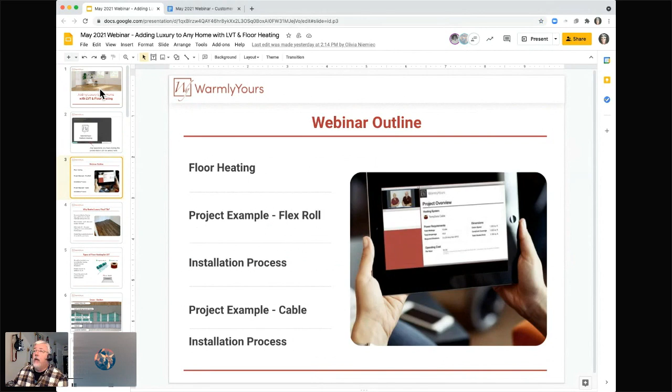So we get the question, why LVT? Well, the reason why LVT is such a popular choice right now is that it's very cost effective. It allows you to get the look of other materials out there in the marketplace without the cost that those other products can lead to. It's very, very durable. It's scuff, stain, and scratch resistant, and it lasts for a long time.

Often it can last 20 to 25 years, making it a more sustainable flooring type. And the thing is that you'll probably tire of the look before it fails or before it gets unusable. So it really has a very good lifespan. And with floor heating, it can add a little bit of extra comfort to your home. So those are a lot of the good things about LVT. It's a very, very popular choice right now simply because of those reasons as we stated above.

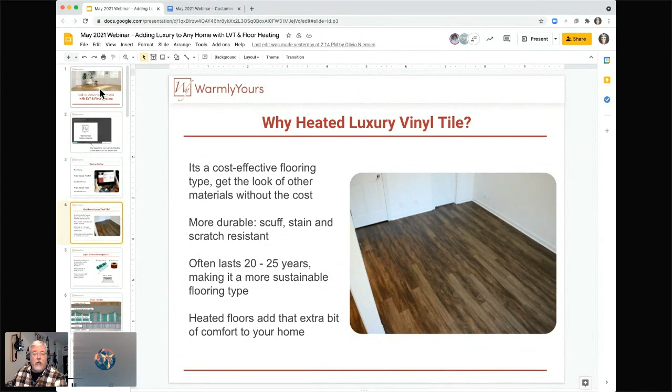And what kind of heat should be used with LVT? We have two specific types of products to heat floors. The thing about LVT is it should be installed over an embedded heating system, such as TempZone. And you'll probably see that in the installation manual, where it will ask you to use the product with embedded heat. As soon as you see the word embedded, it seems a bit counterintuitive, but you'll be discussing our product that is to be used with tile.

So this tile type installation with the cable and with the flex roll allows you to be very, very flexible with the amount of watts per square foot that you're using to heat the product. If you're on a third floor directly over another heated room, your floor is going to start at 68 or 70 degrees anyway, maybe a little bit warmer. So you don't need a whole bunch of watts per square foot, as opposed to if it's on the ground floor over an unheated crawl space. You're going to want more watts per square foot over an unheated space than you are going over a heated space, like a second or third floor room.

The LVT cannot be paired with our Environ floor heating system, the stuff that's silver. So if you see the silver product, it's made for floating applications. You first of all think, oh, my LVT is floating, so I need to use the Environ. Well, you don't want to do that. The Environ is designed for a more resilient product like laminate or engineered wood, and LVT isn't as resilient as that.

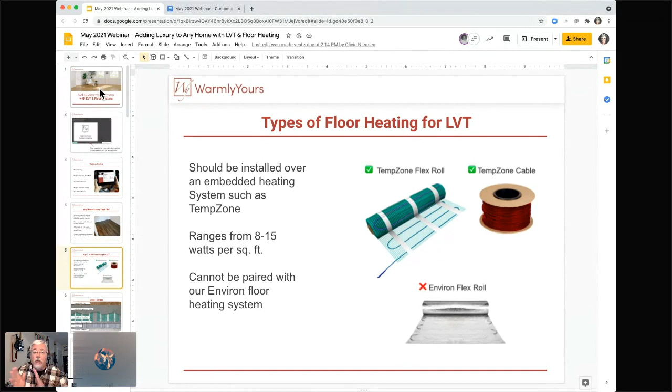So let's go ahead and take a look at the cross sections, and we're starting to put the pieces together why you need to disconnect floating from non-floating when it comes to this particular application. Floating with laminate and with engineered wood, and embedded with LVT. Even though they're both floating products, you're going to be learning the reasons why. So let's take a look at the cross section here. As we talked about, different situations require different modes of protection to provide heat.

So if you're on the third floor over a wooden subfloor, you don't really have to worry about heat loss below the heating system. But when you're going over concrete, you do have to worry about that. So if you look here at the bottom of the picture, you can see the concrete subfloor. The concrete subfloor is going to try to pull any heat down that it can. And that's what happens when you put electric heating wire directly on a concrete slab. It's going to pull the heat down before it ever lets the heat go upwards to where you really want it to go.

Now, in the old days, 30, 40, 50 years ago, the only way you'd heat a floor is with hot water. When you're heating a floor with hot water, you're actually heating a gigantic thermal mass, which is a big, thick concrete slab, 3 to 5 to 6 inches thick.

Well, we found in the electric business that you can regulate the temperature more accurately. You can make it heat up a little quicker, and you can use less electricity, actually, if you just heat the thin layer above the concrete slab. So we're one of the first companies out there to discover that you're going to get better results by putting the electric heating wire on an insulator.

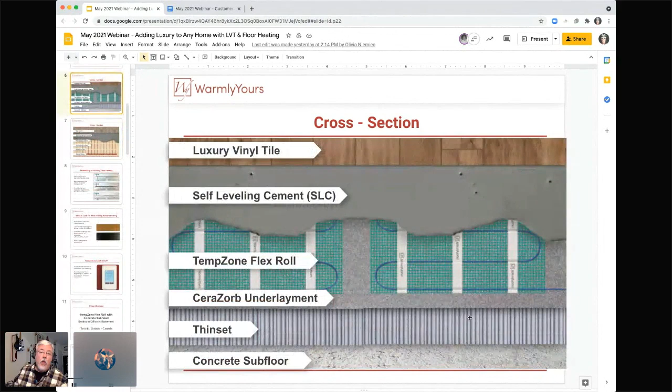So here, we're going to make sure that our mats are attached very, very well to the CeraZorb with hot glue. And here, we're going to make sure that our cables are attached to the subfloor very, very well with masking tape. So that's going to keep the cables from floating. Then you can put the self-leveling over the top of that. That will give you a flat surface. And then you can lay LVT over the top of it. You can even tile over the top of it.

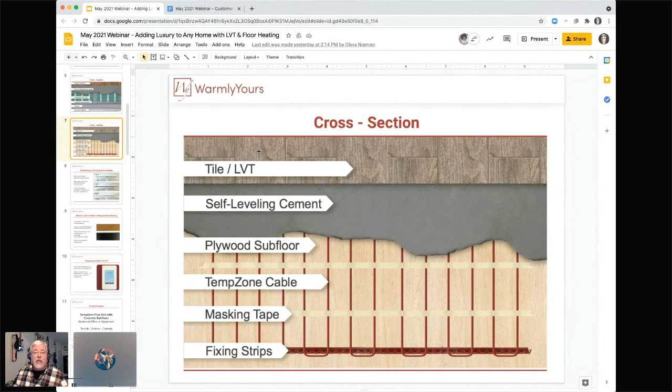This is what a lot of people do when they're installing tile. They'll just put the cable down, then cover it with self-leveling. That gives them a heated subfloor that they can attach tile to. The good thing is, if you get tired of your tile, you can probably remove it and put a new type of tile on there without ever getting down into the heating cable. So what we're showing you here is a way to make a heated subfloor to lay your product on top of.

This gets down to the nitty-gritty on why we strongly suggest that you use self-leveling, because we know it's more expensive. We know people like to mix thin set up very, very thin. But you should never mix thin set up that thin, because it doesn't comply with the instructions. How about that? We'll keep it in layman's terms here.

If we take a look at this embedding versus a floating floor for heating, LVT is much more flexible than other flooring types. It may mold itself to the surface beneath it over the years, so you may not notice a bump in your floor right away. This bump is just a piece we've used as a box, and we let time lapse here so you can see what happens to LVT over time. It's called drape, or sometimes droop, but a lot of times it's called drape. The drape of the LVT causes it to conform to the surfaces below it, so you may see a little spot in the middle of your floor sticking up two or three years later. That's simply the LVT bending around it.

You don't want to be using a product like our Environ product, because with it you can actually feel the ridges of the cable. That's why laminate is used over that, because laminate won't droop over the wire. But theoretically, over the years, if you used our Environ product, you could eventually see the wires going back and across your LVT tiles or planks, because it conforms to what's below it. That's why LVT installation guides usually have a much stricter flatness requirement than laminate, because laminate can bridge little gaps where it's not exactly flat. LVT will eventually droop or drape, and you'll see spots where it's uneven over time.

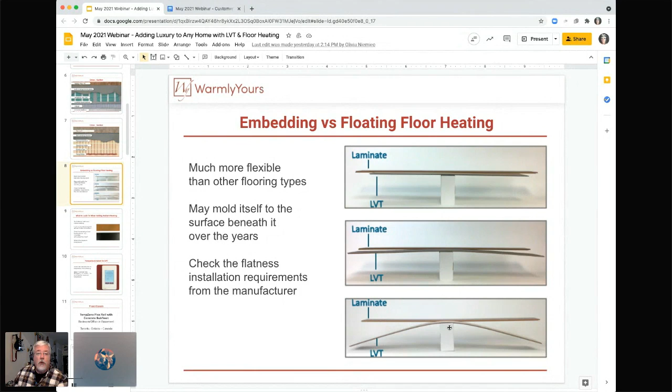Also, another reason why you would never want to use thin set with a trowel: no one can ever get thin set completely flat, no matter how many years they've been doing it. If you leave even a millimeter difference, and you step on a spot that's a little lower, then step on the LVT, it'll sound hollow. That's because even being a millimeter off with your thin set and trowel, any higher areas left by the trowel will create hollow areas on each side of it. That's another reason why you don't want to use thin set over the heating wire, and it's because of this picture here exactly.

What do you want to look for in LVT when you're adding radiant heating to your floor? Try to find an LVT with little or minimal backing. The more backing you have, if it is cork or foam, cork is a natural insulator and foam is an insulator. The last thing you want to do is create a nice flat heated subfloor, then put a layer of insulation over the top of it, and then your LVT. That's what happens if you put a really thick pad between the LVT and the self-leveling.

We want to minimize any R value between the heated subfloor and where your foot hits, so you're going to look for an assembled plank with an R value of less than 1.

Another very important thing is to check the warranty of your flooring choice. Is it compatible with radiant floor heat, yes or no? Because the last thing you want to do is install a product that isn't manufactured to comply with electric floor heat and put floor heat under it.

Also, ask what is the maximum temperature allowed by the manufacturer of the LVT. One thing not on the presentation: if they do allow a maximum temperature, ask them if there is a setback temperature maximum. This means, if you've used one of our products with a programmable thermostat with tile, you can make it 86 degrees when you're walking on it, then cool it down to 70 when no one's using it, which helps you save money.

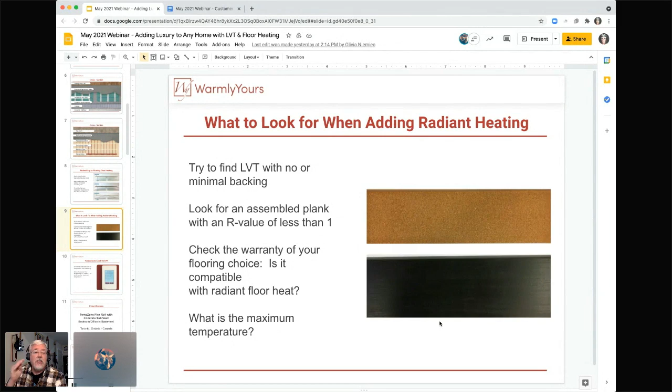So ask if it's allowed to be used with heat, and if it is okay to use with heat, are there any setback maximum temperature deviations that are allowed? LVT is going to have a temperature limit, and the manufacturers will tell you what that is. So check with them and find out what their requirement is.

If they say 82 degrees, well, that's fantastic, because we have an 82 default right here on the thermostat. If they say it's 81, you can go here to custom and choose that and set it to 81. And that's how you would set your maximum temperature limit for LVT.

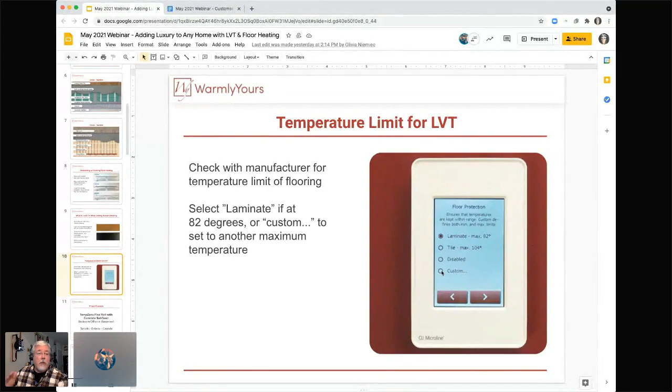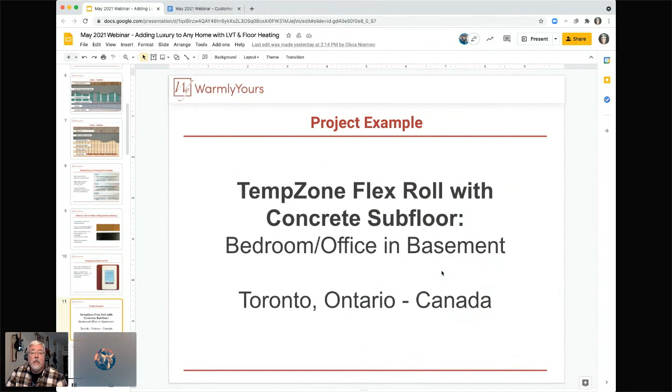So let's take a look at one of our projects that we've done here with a concrete subfloor in a basement in Toronto, Ontario, Canada.

So what you do is you start with a SmartPlan, which is a plan that shows how the product is laid out. And if you've never done one of these before, just get a hold of us and we will do this design for you for free with no obligation.

If you've never done one of these before, instead of trying to figure out how far do I roll this out, do I make any cuts and turns, what do I do? All you need to do is ask us, supply us with a drawing that shows the dimensions of each side, and we will do the installation drawing for you.

Just show us where you want the thermostat, because the thermostat location is very important, because that's where the mat is going to start. So if we take a look, you can see a triangle here, and a square over here. The triangle represents the start point, and the square represents the end point.

So you always want the start point to be within 10 feet of the thermostat, because you need to run the non-heating lead across the floor, up the wall to the thermostat. You also need to be able to get your thermostat sensor there, and you would run it in a different conduit up the wall to the thermostat.

It'll tell you what product fits in there, and also make sure that your dimensions are correct. So before you go cutting and turning your product, make sure that these dimensions shown on the plan actually match what is in the room.

We know in the construction business, room dimensions can change. If room dimensions get bigger, that's not the end of the world. But if they get smaller, it is, because you cannot cut the heating cable or the heating product. You can't buy an 800-foot cable and just string it across the room and then cut it when you're done. You cannot do that. You never, ever cut the heating wire.

The most important thing is to warm the area where your feet are. There's no way you're going to be able to heat every square inch of the room. So we try to find the unit that heats wherever you're going to walk, and not heat areas right up against the wall, because no one ever stands right up against the wall. And if we can eliminate heating those areas, we're going to save money on the heating product that you purchase. It's also going to save money on the operational cost.

So if we heat 129 square feet right here, we have a total wattage of 1900 watts, total amperage of 8.1 amps. So that is a 240 volt circuit. If this installation were under 120 square feet, we could use 120 volt. But because it's over 120, we're going to be using 240, because our thermostats can only switch 15 amps. 15 amps at 3-inch spacing, or 15 watts per square foot, equals a limit of about 120 square feet on one control. But if you use 240, you can go up to 240 square feet.

So that's the only benefit of 240 over 120 - it allows you to cover twice the space with the same number of amps, so half the amps in 240. If this were a 120 volt system, this would be way over - this would be 16 amps. You couldn't control it with one thermostat. So that's why this has been designed in 240. 240 is not more efficient than 120.

So down here at the bottom, we see operating costs, and here we can see per day to operate it.

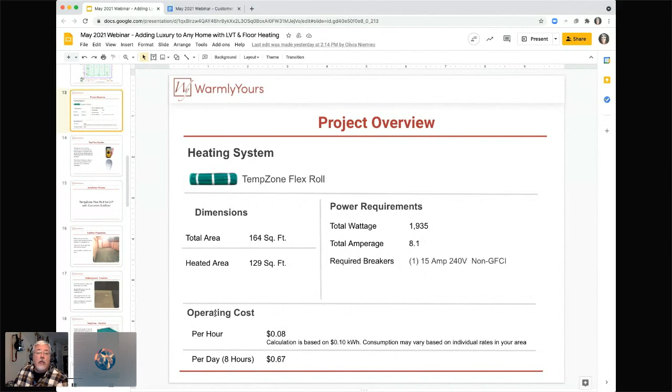When you get the product, test it. Make sure that it's good before you go to install it. If you get the product today and your installation is next week, test it today, because if something happened to your product from the warehouse to your doorstep, you want to find out now so you can get a replacement ordered and it's there in time. The last thing you want is a crew coming over, they've got the self-leveling mixed up, all mixed and ready to go, and you test it and it tests bad. Okay, bye everybody, come back later and we'll put it in when we can get a good product. You always test the product the day you get it to make sure that it is good.

You are going to need a digital ohm meter. There's no way to do this installation without one. The good thing is a digital ohm meter is usually $20 or less at any big box store. You want to use a meter that is not self-ranging - you want to be able to turn the knob right to the 200 range, not have it automatically trying to find the range. Get one that's inexpensive with a knob on the front that you can set to 200 and then 20K. The 200 is to test the floor heating, the 20K is to test the floor sensor.

So not only are you testing your product three times - before, during, and after your installation - you're also testing the thermostat sensor. And when you're actually working over the product, laying it out on the floor or covering it with self-leveling, you want to make sure that you have the circuit check on.

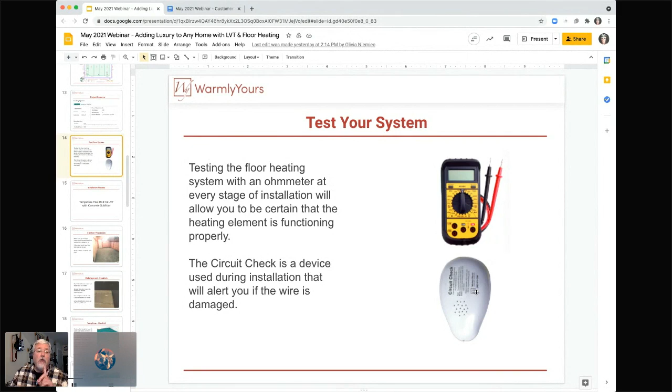So that's why it's so very important to test the system. You're going to need a circuit check, and you are going to need a digital ohm meter. So please keep that in mind.

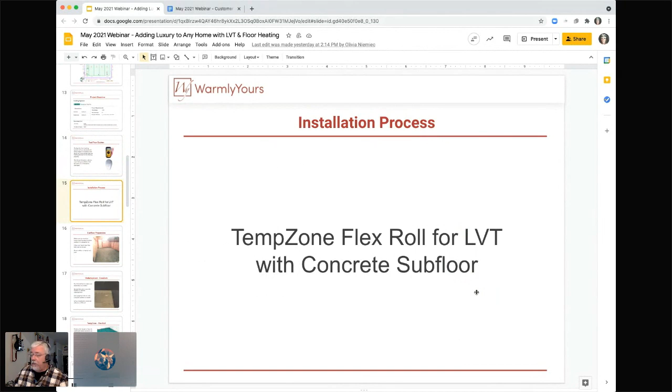So let's take a look with a TempZone Flex Roll with LVT on a concrete subfloor. We're building up to it - let's look at the real life installation. Here with our subfloor preparation, we're going to make sure that we check the LVT to make sure that it's good to be used with heat. If the floor isn't level at this point, we're going to put self-leveling on it first to get it completely flat. Then we're going to install the cable.

If this were a really old house and the slab was like this, if you put a cable here and a cable here and your floor is here, your edges are going to be warm, your center is going to be cold because they're too far away from the top of the floor surface. So that's why you need to level it first and then do all the buildup like we showed before. Make sure you clean the subfloor, get rid of the debris, and please make sure there's no grease or oil - those will need to be cleaned, because nothing will stick to it if you don't.

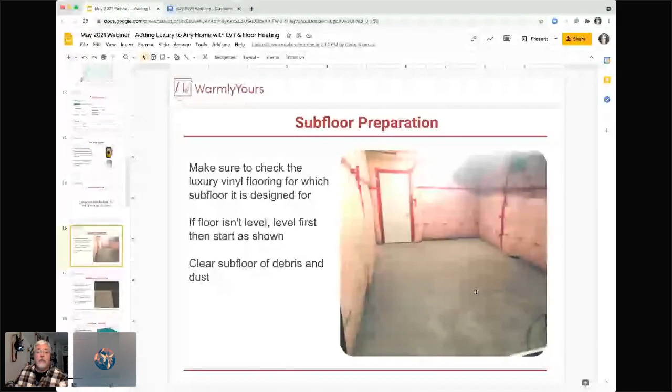So here we're going to be installing the Cerazorb. We dry fit the Cerazorb, and we do all of our cuts to make sure it fits. Then once everything fits, we start using the thin set, modified thin set, to attach it to the slab.

Use a weighted roller to get that Cerazorb adhered to the slab, and also lift up on the Cerazorb and look underneath to make sure you have good adhesion. If not, you need to make your thin set a little bit better. Sometimes the thin set has gotten too old, and when you push it down, it doesn't grab. So it's very important to make sure your thin set is in good condition and not timed out.

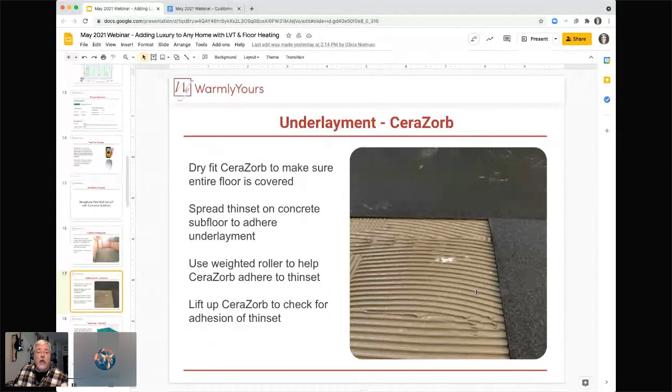So here we've laid the flex roll on the floor, and we followed the plan that we saw up here. Remember, here is our plan for this particular space, and here is us laying it out on the floor, just following the instructions.

So if you take note, we are going to be putting the cable side down. That's a question we get all the time. The roll is a piece of mesh that's fiberglass, and there's cable attached to one side of it. You can either install it cable side up or cable side down. We always recommend you install it cable side down as much as possible, because if you do it cable side up, the loops are not attached, so they're going to try to float to the top. You'll have the loop up here and the mat down here. That's why it's important to turn it mat side up, cable side down, because that keeps the loops from coming to the top of the pour.

So you're going to do your cuts and turns, lay it out on the plan, and then attach it to the subfloor using hot glue. Don't lay it out, glue it down, then do the next one and glue it. Do not do that, because you want to make sure everything fits first in the room, and then if everything fits with your cuts and turns, you go back and glue it down to make sure everything fits the way it should.

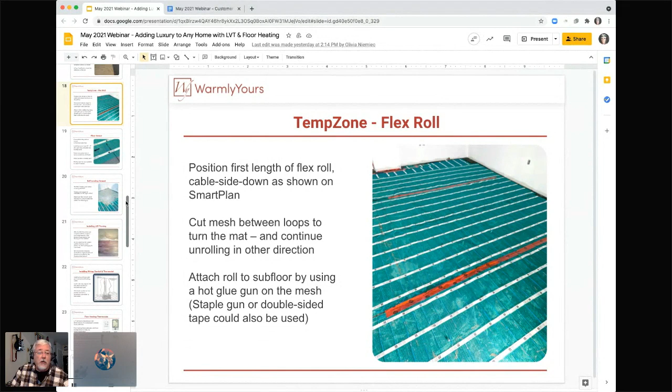Don't forget your floor sensor. The sensor is included in the thermostat box. So you may say, hey, I've got my thermostat, we'll worry about that later, I'll put it in after the system's installed. Don't do that. As soon as you get the product, open the thermostat box up, take the sensor out and give it to the installer, because they are going to need to have that. You would not believe the number of phone calls we get from people saying, I forgot to put the sensor in, we installed my entire floor and we didn't put the sensor in. That's because they forgot to open the thermostat box, take the sensor out and give it to the installer.

Here we can see with this drawing that the wires are facing downward, cable side down. Here we can see there's a loop right here, might be kind of hard to see with my cursor, and you can also see there's wire over here. We're running the sensor into the open loop, and we're only running it about 6 or 7 inches in.

You sometimes will see an installation where they run it all the way into the center of the room. You don't want to do that. The sensor only has to go in 7 or 8 inches into the side of the product, but put it somewhere where the sun is not going to hit it. Because if the sun hits the same spot every day, the sensor is going to think the whole floor is that warm, when really where the sun is hitting it's 85 degrees, and the rest of the floor is 65.

Keep in mind that the temperature from the sun is actually going to make your floor warmer than the floor heating elements below it ever will, because we're limiting our temperature to 82 or 83, whatever that requirement is, but there's no limit from sunshine. So sunshine hitting the floor can make it 120 degrees. That's something to keep in mind. The LVT, because you're using a temperature in the 80s, is not going to be damaged by the floor heat.

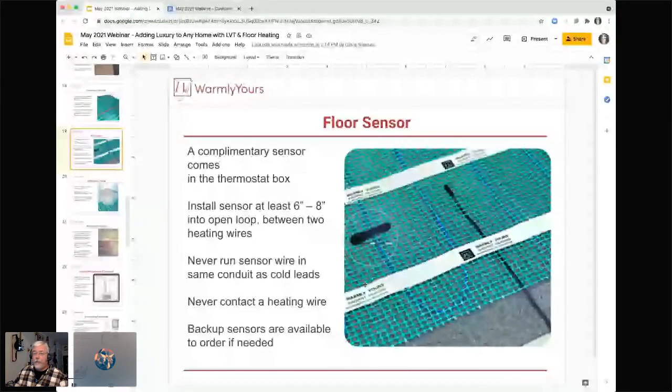So let's take a look at the self-leveling cement. If you're going to be doing one of these installations, it's good to have at least 2 people, and preferably 3, to do your self-leveling installation. Self-leveling is not a job you want to do by yourself, because while you're pouring the self-leveling over the heating product and working your way from a remote corner over to the doorway to get out...

While you're pouring the self-leveling and smoothing it out, you want somebody else to take that empty bucket back and trade it with the person who's mixing up the next batch. He gives that to the guy that carries it, and the guy that carries it brings it to you, and you pour out, keeping that circle going. One guy is mixing all the time, one guy is carrying back and forth, and the other person is putting it on. You can do it with two people, but I suggest if you're doing self-leveling, do not count on doing this by yourself, because if you have a big space and you're working one side, eventually these areas are going to have to be mixed together.

We don't want one side hard as a rock or firming up while there's a brand new pour over here. You want that all to be liquid in that entire space and work your way towards the door to work out of the room. Now, you should use 3/8 of an inch of self-leveling unless the flooring manufacturer says they require 1/2 inch of self-leveling—then you use 1/2 inch instead of 3/8.

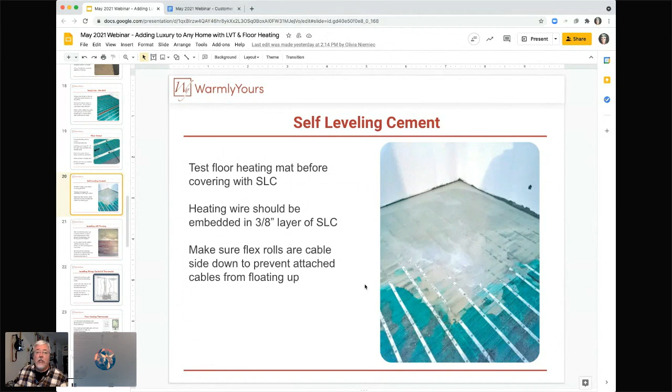So now that we have the subfloor poured and the self-leveling installed, make sure it's dried and complies with the moisture level requirements of the flooring manufacturer. At that point, the flooring can be installed. Do not power up the system until the self-leveling has cured. The way to know the cure rate is it'll tell you on the side of the bag. Do not turn heat on to the self-leveling until it has cured—not hardened, but cured. That cure rate is on the side of the bag.

Also, we recommend following the acclimation rules required by the LVT manufacturer. They'll say put it in the house for 3 days before you do anything, or 6 days before you do anything. Don't turn on the heat within 3 days. Follow all those instructions, because if you turn the heat on too soon in the self-leveling, it can cause problems in the future. Always follow the rules when it comes to cure—not hardened, but cured.

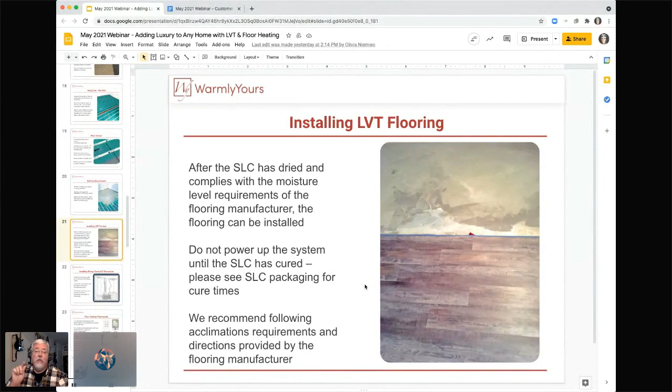The sensor and the non-heating leads can never go in the same conduit. First of all, it's usually against code. Second of all, your temperature on your thermostat will never be correct because the low voltage wiring is running right next to the high voltage wiring, and the high voltage wiring will block the signal because of induction.

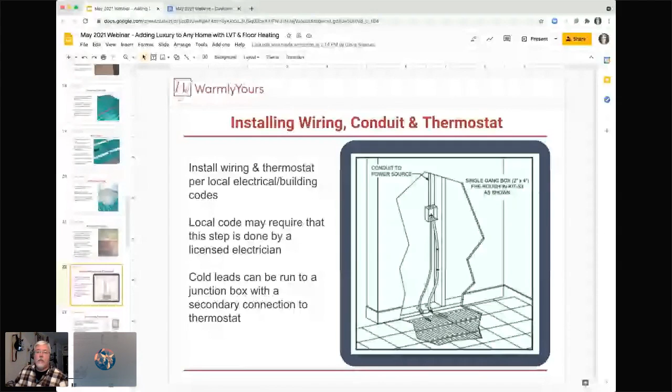Your local code may require that any of the steps when it comes to wiring be done by a licensed electrician. We always recommend that a licensed electrician do the wiring for this product. So let's take a look at the LVT floor heating thermostats that we have. LVT is probably going to have a temperature limit determined by the manufacturer. Always check with them.

Another question that we get is, oh, I love this brand like Nest, or I love this other brand of these thermostats because I use them to control my HVAC system. HVAC thermostats are not line voltage, they're 24 volt, they're low voltage controls. Our product installed in the floor is either 120 or 240.

So a product like a Nest can be used to control your floor heat, especially with tile, because tile has no temperature limits. And the reason why we bring that up is because Nest doesn't have an input for a floor sensor. There's nowhere to put the floor sensor in a Nest. So the Nest never knows the temperature of the floor.

Well, you're using a floor that has rules for warranty compliance that say this floor can never get over 82 degrees, or it can never get over 84 degrees. If that's the case, this thermostat that doesn't have a floor sensor input has no idea what the temperature of the floor is. It has no way of regulating the temperature of the floor. It either turns it on or it turns it off.

These controls on this page are able to regulate the floor temperature because the sensor is put in the floor and the sensor attaches to the thermostat. So if you've ever called us before and said, yeah, I'm going to be doing laminate, or carpet, or LVT, can I use this brand of low voltage thermostat? Our first question is going to be, does it have an input for a floor sensor?

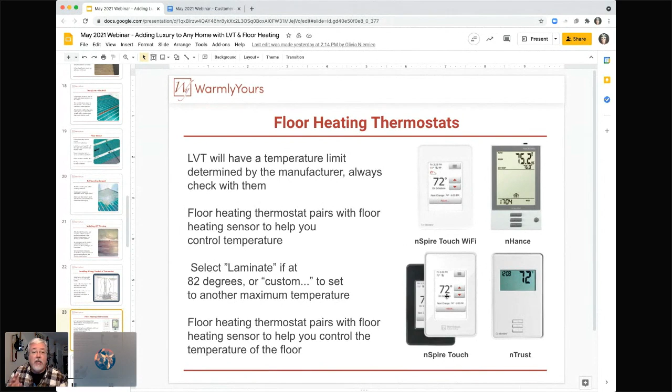If they do allow you to set it back, then use the Wi-Fi or the Touch, because they will let you set it to 82, and then at night when no one's on it, set it down to whatever temperature is allowed. That's what we mean by setback temperature. That's a very important question to ask.

So let's take a look at the finished product. The finished product looks like we have a beautiful floor, and it works like $1,000,000 because it's so nice and flat. You walk across it, you don't hear any of that hollow steps that are caused by using thin set instead of self-leveling. You have a nice flat floor that feels solid underneath, that doesn't sound hollow.

So let's say that 5 years down the road, we decide, you know what, I hate this color. I'm going to change the walls to orange, and I want to get a different color. That's fine. All you do is you lift up the LVT, you take it to recycling, and you put in LVT that looks better with orange walls, and all of a sudden you now have a brand new room decor, and you have not even touched the heated subfloor. You just pull the old floor up, put the new flooring type down, and you are set.

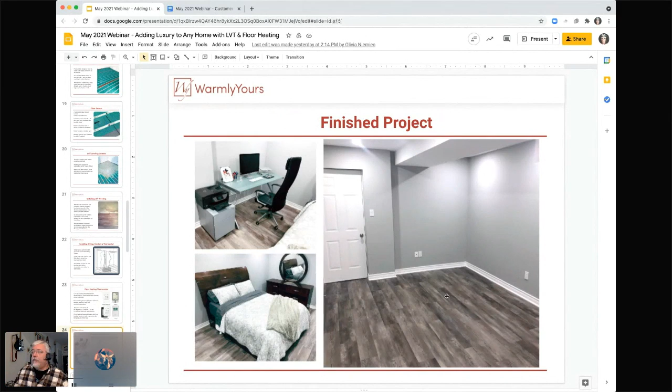So let's take a look at this installation. The project cost for this TempZone roll was $2,267. And that includes the TempZone Flex Roll. That also is the nSpire Touch thermostat. It includes the circuit check and the Cerazorb.

Now you're going, oh, I'm going to look at the Cerazorb price. This looks pretty expensive. Well, Cerazorb, once again, is going to allow you to go from a floor that doesn't feel cold to a floor that feels warm. If you're spending $1,100 on a heating mat, do you want the floor to not feel cold because it's only able to get up to 74 degrees? Or do you want it to feel warm because it can get up to 82 or even higher? That is your decision, and that's where Cerazorb comes in, because if you put the heating wire directly on the concrete, it's going to make the floor feel not cold.

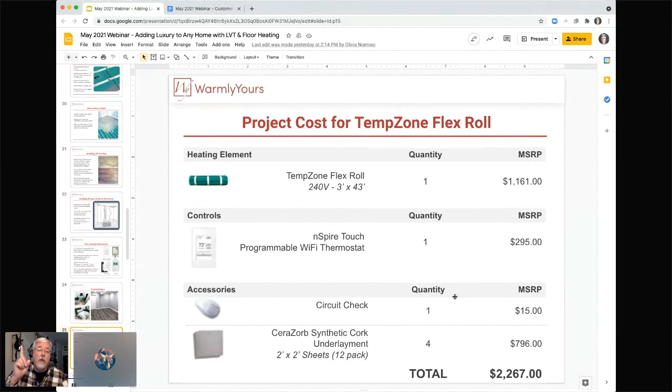Seems like kind of a downer. I spent all this time and money, my floor gets to 74 degrees. Okay, well, it doesn't feel cold, but it doesn't feel warm. If you want it to feel warm, you're going to want the Cerazorb, because that is going to allow the heat to go up into the room as opposed to down into the concrete slab.

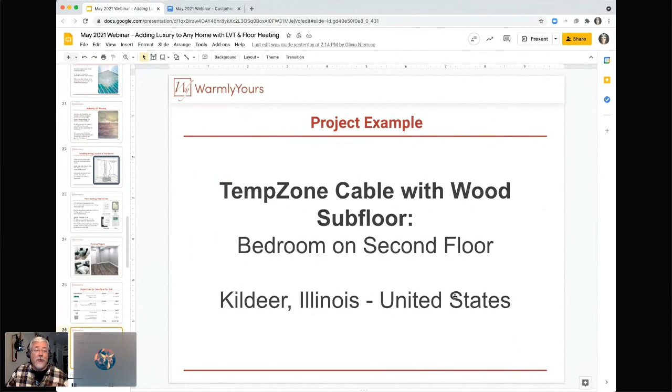So let's take a quick look at the TempZone cable with a wood subfloor. It's on a bedroom on a second floor, and it's in Illinois. So once again, we're not showing you Florida installations. We're showing you real world cold, because I live close to Kildeer. I know it gets really cold in the wintertime. So these are real world examples that we're showing you here.

We have a closet. Now, the National Electric Code frowns upon heating inside of a closet, so we didn't heat that area. First of all, no one stands inside of a closet. There's no reason to heat a closet, and it's against code to heat a closet, so you might as well not do it. But what we are doing is we're heating under a bed, and when you heat under a bed, you need to make sure that the bed is not a boxed bottom bed, because anything that has a solid bottom that sits directly on the floor is going to trap the heat. Trapping heat causes overheating.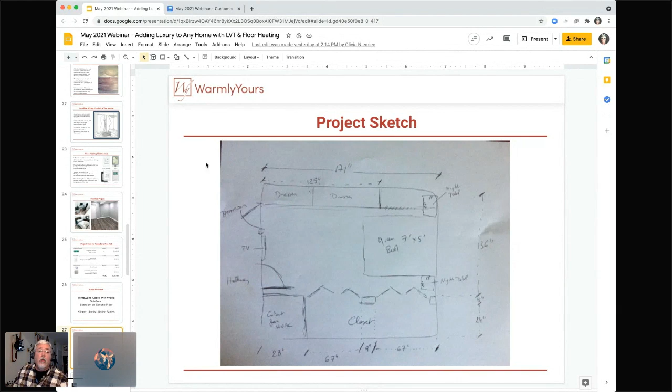So here is where our room setup is noted. And here's our SmartPlan for the cable, because we're going under those chests, we're going under those dressers, we're going under the bed. But the thing is, the bed is up on a bed stand, or a mattress stand, or whatever, I can't think of the word right now. And these are up on legs.

So let's take a look at TempZone cable for LVT with the wood subfloor. So here is our wood subfloor. Make sure to check which subfloor the luxury vinyl flooring is designed for. Make sure that you can heat it. Primer should be used before you put anything on top.

One thing we didn't mention before when we were talking about the Cerazorb and putting the heating on top of the Cerazorb on concrete: when you put the Cerazorb down, that's when you're going to want to cover it with the primer if primer is required by the self-leveling. The self-leveling bag will say it requires such and such primer. If they require it, they'll tell you the brand and the type. Always use that so you get your warranty.

So this floor, as you can see, is kind of shiny. Normally plywood or OSB isn't that shiny, but it's shiny because that's the primer for the self-leveling. And believe me, the first thing you want to do is make sure that you plug any holes around the perimeter or any holes where you've pulled up a nail and it now goes down into the kitchen below, because you will have a pile of self-leveling in the kitchen below if you don't plug those holes.

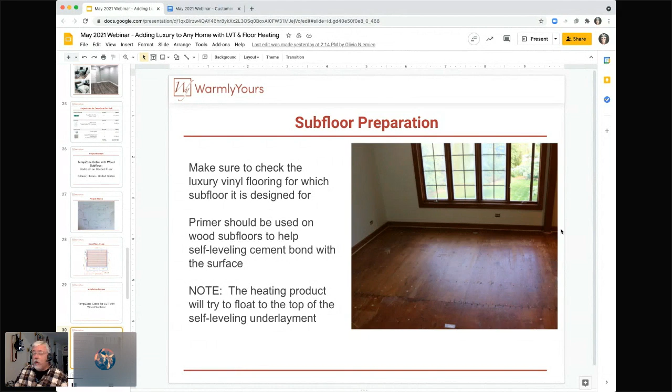So we had to use some caulk in some areas here, and we had to caulk the seams in a couple places, not everywhere. We didn't even use a whole tube, but we filled any holes and any cracks. If you look really carefully, you'll see that there's a bead of caulk around the edge. That keeps the self-leveling from going down the walls. So remember, the product's going to try to float to the top, so make sure that you adhere it very well to the subfloor.

And here you can see now that the primer has dried. Now we've laid our cables and cable strips out on the floor. Make sure that you keep that evenly spaced. This particular job is 3 inches. On the second or third floor in a warmer climate, you may be able to do 4-inch spacing instead of 3. That'll save you energy costs, and it'll also save you installation costs because you're buying less. So if you're in a warm area on the second or third floor, investigate 4-inch spacing instead of 3.

So you can use glue, screws, or nails to hold the strips down, and then you just roll the cable back and forth inside the strips.

If you take a look at the installation plan, the plan has a red dot, and that red dot is the halfway mark. If you're laying this product out and the red dot ends up over here, that means you're using too much cable and you're going to run out. If your red dot is over here, that's the halfway point of the cable, so you should be halfway done here. If you're halfway done over here instead, your spacing is too wide, and you need to go back and make it narrower to comply with electric code and to fit into that space. That's why we put a white piece of tape halfway on the cable, so it matches up with the halfway mark shown on the plan.

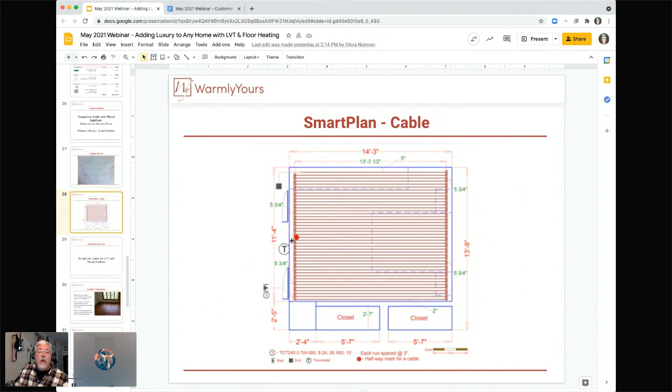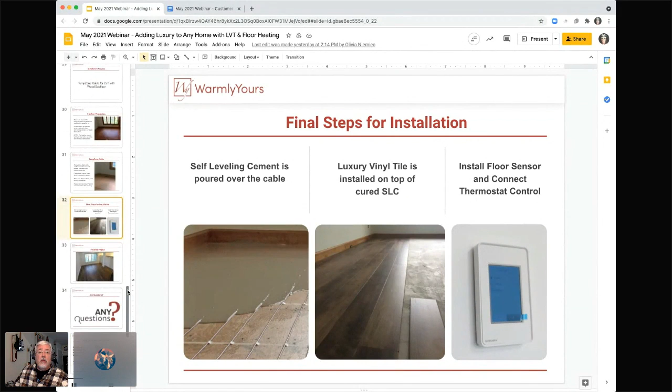And then we installed our thermostat, because we put our thermostat sensor in the floor when we were doing our installation. It looks fantastic, that is a great looking floor. You can't tell it's LVT, it gives you a nice firm feeling underfoot, and it also has the sensor built in, so we know we're not overheating it.

The sensor, if you were curious, is over on this wall, not here where the sun hits. Remember, you never want to put the sensor where the sun is going to hit it, because that spot on the floor could be 90 degrees while the rest of the floor and building could be 60. So always put the sensor on the wall away from the sunshine.

So now is a perfect time to ask any questions that you might have. And we do happen to have some questions that I had a while ago and then lost them. Oh, here we go. Let's take a look here.

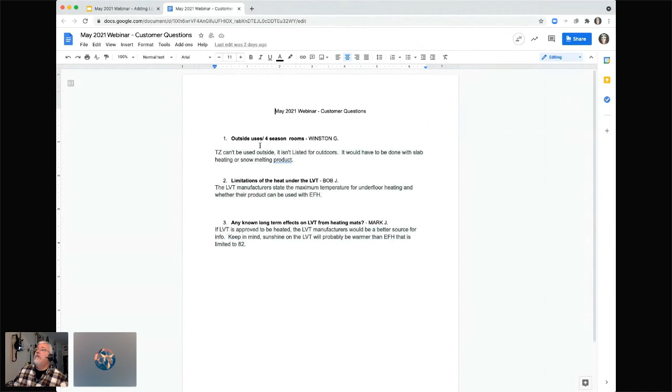Question: outside uses, 4-season rooms, from Winston. Winston, this is a great question, we get this all the time. Let me expand this so you can see it better. So outside uses, 4-season room. First, ask yourself, is it a 4-season room, is it a 3-season room, is it inside or outside? Certain of our products can be used indoors but are not allowed outdoors, and certain products made for outdoors cannot be used indoors. How do you know indoors from outdoors? If at any time during the season rain or snow can hit the floor, that's considered in most cases an outdoor space, because if you're indoors, rain or snow should never hit your floor. So if your floor is going to get hit by rain or snow, that's an outdoor application, and that's probably what your inspector is going to be looking for: is this indoors or outdoors?

Remember, the product always has to be installed per the National Electric Code. Local code always overrules the national code, local code is what is gone by, national code is just the guideline designed to apply to most jurisdictions. So TempZone, the product we've been talking about all along, cannot be used outdoors. If this floor is going to be hit by water, snow, or rain, TempZone is not listed for outdoors. You have to use our snow melting product, which is listed for outdoors. Snow melting has a whole different application, different installation methods and thicknesses, so keep that in mind. You may be able to use slab heating cable, which can be installed outdoors. But the TempZone product we've been talking about cannot go outdoors.

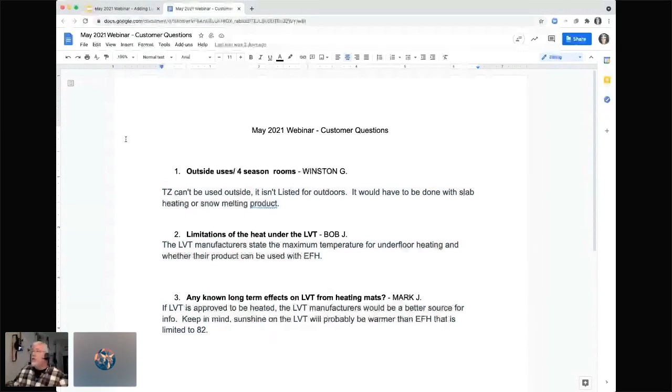So those are some fantastic questions that we got from those three folks. Thank you so much for asking those questions. And it doesn't look like we have any questions from Facebook.